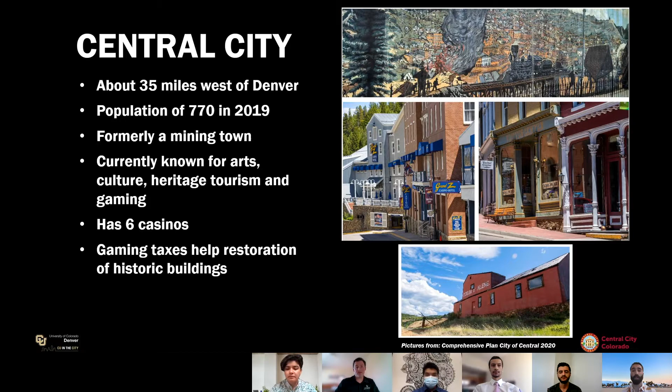Our client, Central City, requires an additional method of generating tourism into the city while also enhancing outdoor recreation opportunities. By building a trail connection along Central City Parkway from the city core to the base of I-70, with a long-term goal of connecting to the Peaks to Plains Regional Trail Network, it will achieve this goal.

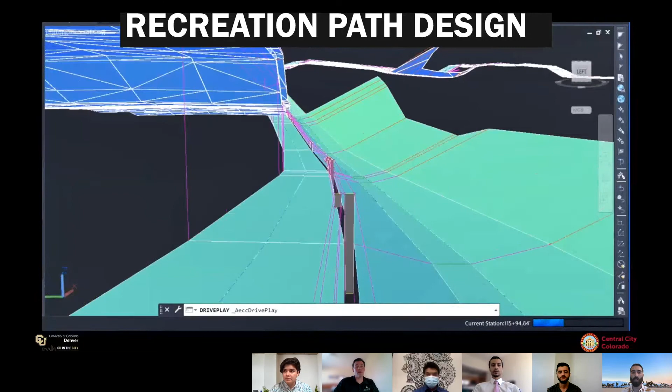In this drive-through, we are on the bike path with the parkway on our left and the drainage ditch on the right. We propose moving the existing concrete barriers in 3 feet towards the center of the parkway. To create an 8-foot path, we will use the 3 feet of the existing shoulder and pave the additional 5 feet. In the portions where the land drops into ravines, we propose to mirror the terrain with the path, cut into the hillside, and install retaining walls on one side with a railing on the other.

The area being analyzed is in Gilpin County and belongs to the Clear Creek watershed. The watershed analysis shown encompasses 1,258 acres of land and is made up of 90 drainage basins. They were calculated using the watershed feature in computer automated design in Civil 3D. Along the Central City Parkway, there are 16 6-foot culverts. Basins 62, 37, 63, and 61 were analyzed because those are the areas where cut and fill will be implemented.

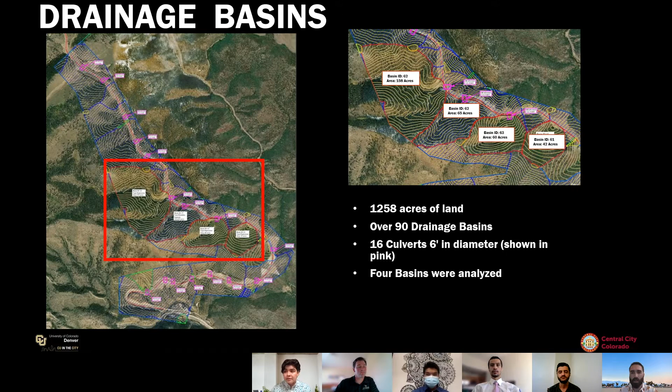Because Basin 62 was larger than 90 acres, we used the Colorado Urban Hydrograph procedure for generating hydrographs from the watersheds, complying with the standards of the Urban Drainage and Flood Control District Drainage Criteria Manual. Because this is an undeveloped area, the historic flow analysis recommended is 2% imperviousness. To determine how the imperviousness percentage would change, we calculated the area of the path, including the Jersey barriers, and discovered the changes were minimal, increasing from 0.05% to 0.76%.

For conservative purposes, we rounded the imperviousness percentage to 3% and calculated the potential runoff. As you can see from the table on the right, the maximum flow increased by less than 1 cubic foot per second, resulting in an insignificant increase in runoff. In conclusion, the existing culverts will suffice.

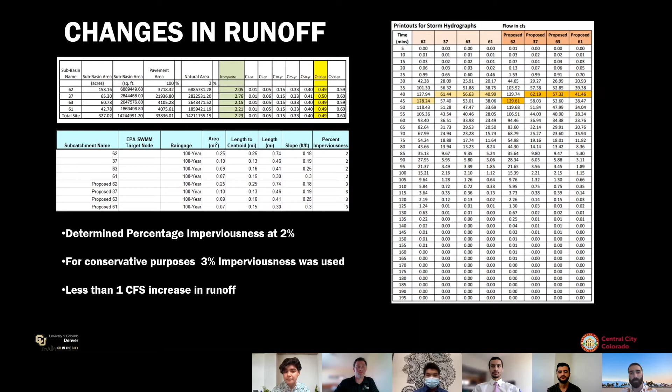Our design path ends a few hundred feet after Young Ranch Road, and we needed a way to get cyclists across the parkway into Lake Gulch Road, and safety was our main concern. Having them continue their path along the road was hazardous to them and to the drivers. On the north side of the parkway is Lake Gulch Road, which is an easy path for riders to make it to Central City downtown. We had a few different ideas on how to get riders safely across the parkway, and the most feasible idea and design was a tunnel.

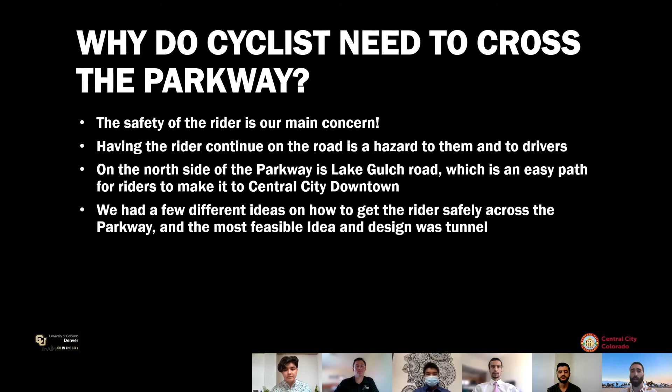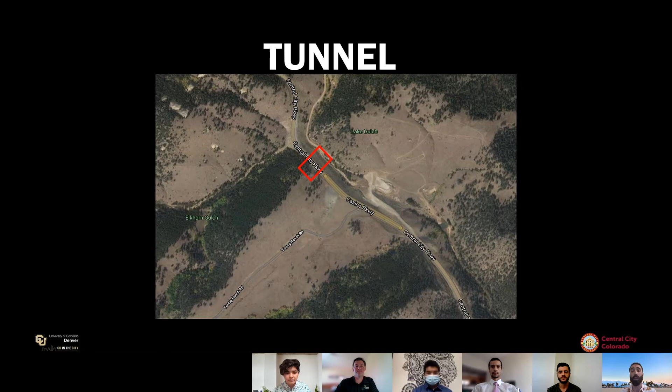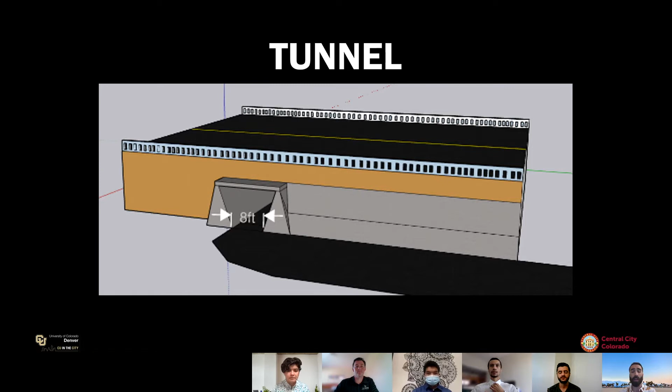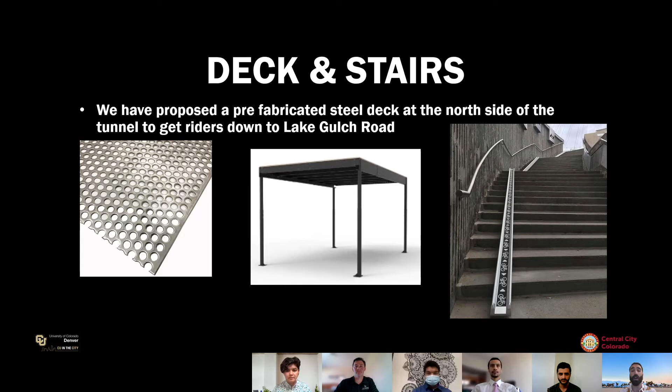This is an aerial photo of our proposed location for the tunnel. This is a great location due to the slope of the side of the highway being so great, and it allows the tunnel to be cut and filled in there. Here's a rough sketch of what our tunnel will look like. It's an 8-foot path held with retaining walls, and that's the south side of the parkway. For the north side of the parkway, we proposed a prefabricated steel deck and stairs to get riders safely down to Lake Gulch Road.

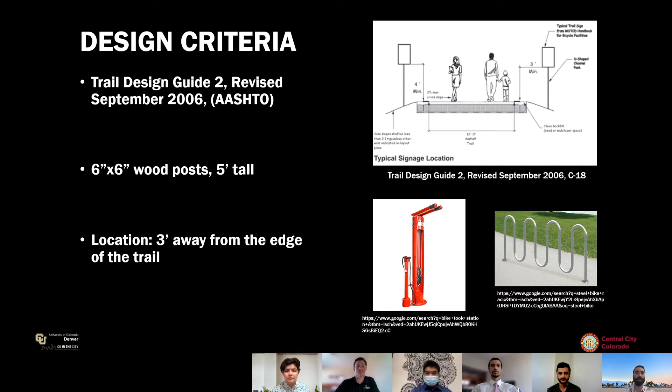For the rest area, we followed the trail design guide prepared by the American Association of State Highway and Transportation Officials, known as AASHTO. For example, our design consists of 6 by 6 inch wood posts, 5 feet tall, placed at least 3 feet away from the edge of the bike path. Since this bike path has a major slope change, ranging from 2 to 12%, it was impossible to follow the criteria to comply with the Americans with Disabilities Act.

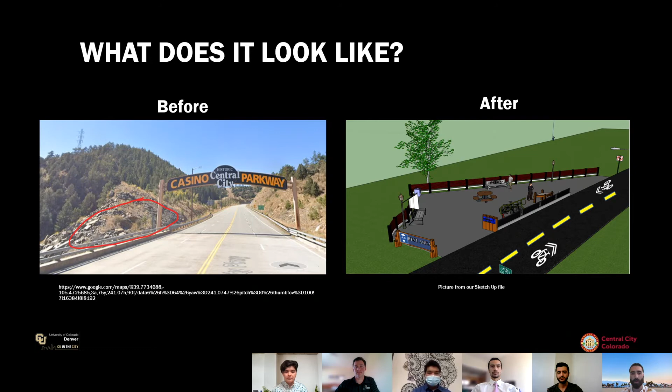As you can see in the picture, we used the software called SketchUp to create a visual look of what the rest area looks like. As you can see, we include the trash can, bike marking, and the fence. For the rest areas, we're going to install aspen trees because they don't need any maintenance and grow to 65 feet at most, so they will give shade for the areas.

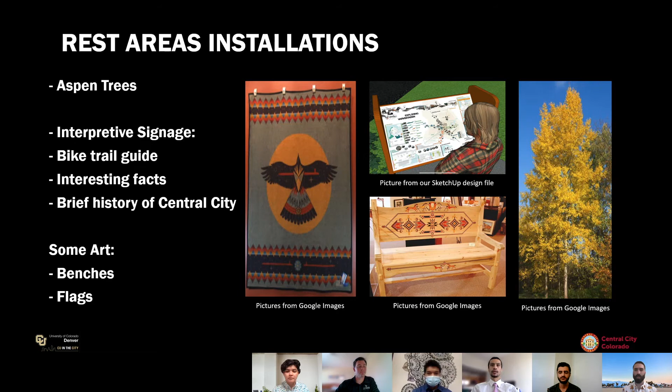An interpretive signage has the bike trail map guide, and because Central City, Colorado has a big history of Native Americans and mining, we're going to have interesting facts about Native Americans, the Ute tribe of Colorado, and Central City's mining history in our signage. Also, each area will have some arts as shown on the benches and some flags that represent the history of this land.

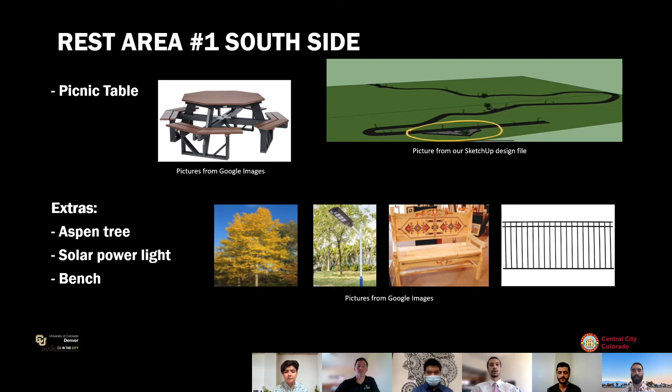In order to give our client a precise cost estimate, we used RSMeans. RSMeans takes into account the labor cost, material cost, and equipment cost. We divided our cost estimate into two sections, one for the bike path and one for the tunnel. For the bike path, we have excavation, retaining walls, asphalt pavement, jersey barriers, and rest areas costs. For the tunnel, we also have excavations, fills, retaining walls, prefabricated staircase, slab, asphalt, footings, and miscellaneous.

We also included civil engineering design costs as well as contingency costs. We included 5% contingency cost in order to cover any costs that we may not have predicted while doing our cost estimate. The total cost for the entire project is around $4.2 million.